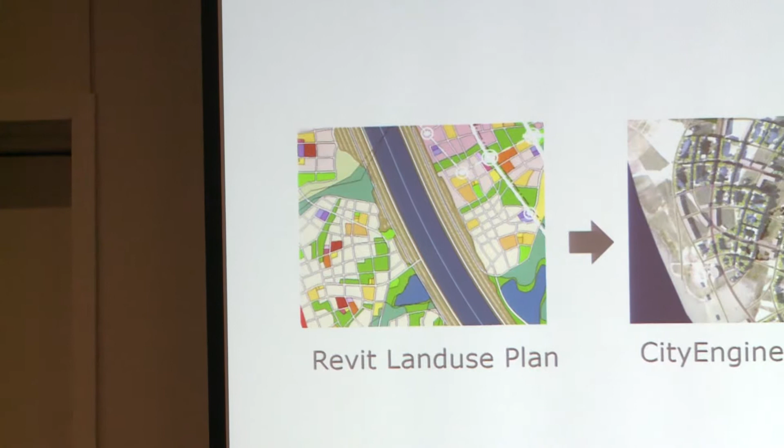So we actually have a sort of unique workflow, being that our urban planners work in an architecture firm. We use a lot of Revit. They use Revit like a hacked together GIS tool. So they do all their 2D land use planning in Revit as huge rooms, which is really odd, but nothing to do with GIS - it doesn't even know where it's on Earth. But at the end of the day, it looks like a themed map, and we can put them in books and stuff like that.

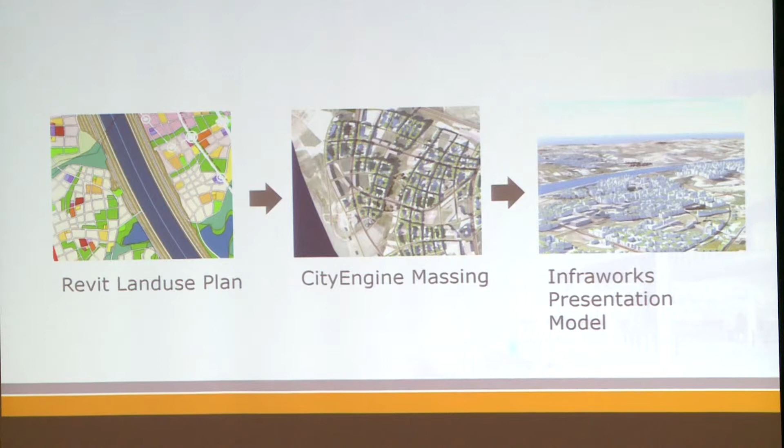So the workflow we actually worked through was Revit land use planning to City Engine massing, and all of that then got into InfraWorks, so it's like every product you could think of. We used this transect methodology that I mentioned.

Really, the workflow looked like this. So we would start in Revit, go into FME, go into City Engine for 2 pieces of data, both center lines and plots. And then also we would render out geotiffs from hatches and AutoCAD to make an image background to actually drive the land use planning. And then we'd use Civil 3D back into FME, and then also ultimately everything went back through FME into InfraWorks.

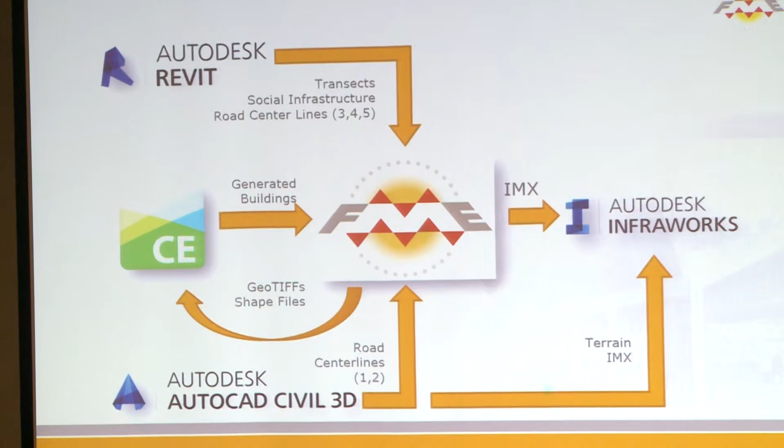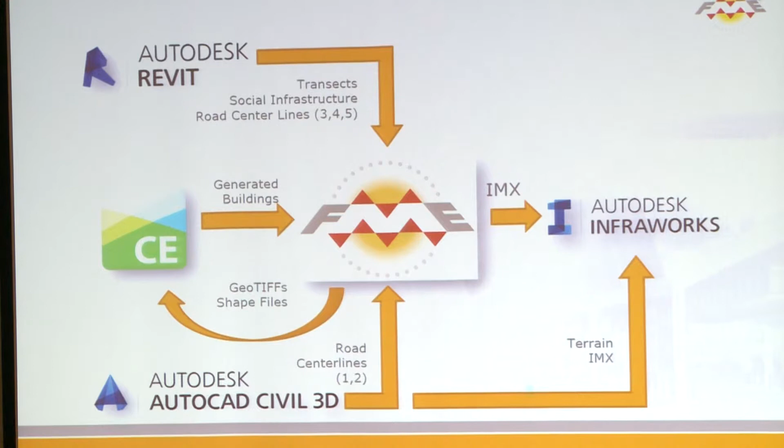So you ask why we did it that way. Well, InfraWorks is the only thing we could show someone a city this big. City Engine was the only place we could sort of programmatically develop all the buildings based on actual use, and Revit is where we actually did the planning. And then our engineers that were doing road center lines were working in Civil 3D and developing the topo surfaces.

This is a slightly modified version of the same thing that we're using on our next project, just more, slight variation on the inputs. I'm sure City Engine will come into play here, but now we're just saying we're going to go out to ArcGIS Online for publishing some data as well.

So this is the Revit workflow, and there are some animations here I always forget about. So Revit rooms become hatches, which go to AutoCAD, then into FME to develop the plots. You can see here we get an image-based background that comes out of that.

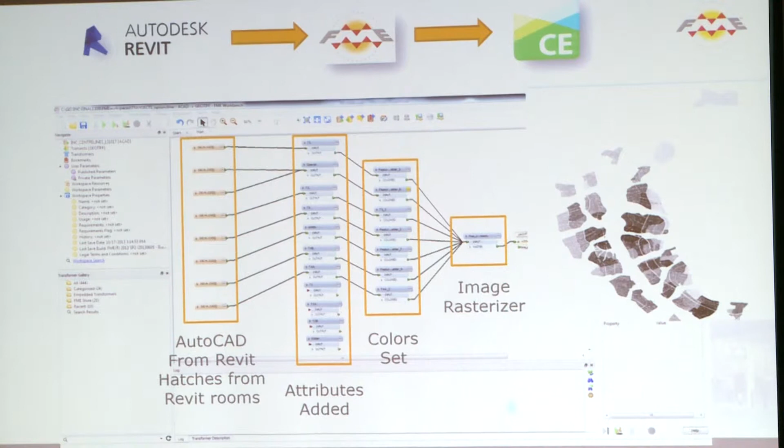That's actually the driver we use in City Engine. In AutoCAD, out of Revit, it was just hatches, so we gave them a tonal value from 0 to 1 in grayscale. That's how we mapped what in Revit was land use to how City Engine would manipulate the buildings and apply the appropriate City Engine rules on top of it.

Then we did the same thing for center lines. If you know Revit, these were room separation lines used as street center lines. A very odd workflow, but ultimately we were able to put it together.

The important thing to know is that really two people in this project worked outside of Revit. One person, Chris, built the City Engine workflow, learning City Engine at the same time as learning FME and putting the workflow together. Everybody else just worked in Revit, then did modifications to the rules to develop the content as it came out of City Engine.

Once we were in City Engine, we used 3DS. There were some limitations on coordinate system support in the version of City Engine we were using, so we couldn't go back through a file geodatabase directly into FME - we had to go out through a 3DS file. But all things being equal, we were able to do that.

With these land use plans we were developing - in Revit, once you have a room, you can essentially theme them in multiple views. So we developed a series of properties on those rooms, and those were dumped out as separate shape files for different land use types, or variations of shape files for different layer sets. We were merging and combining them.

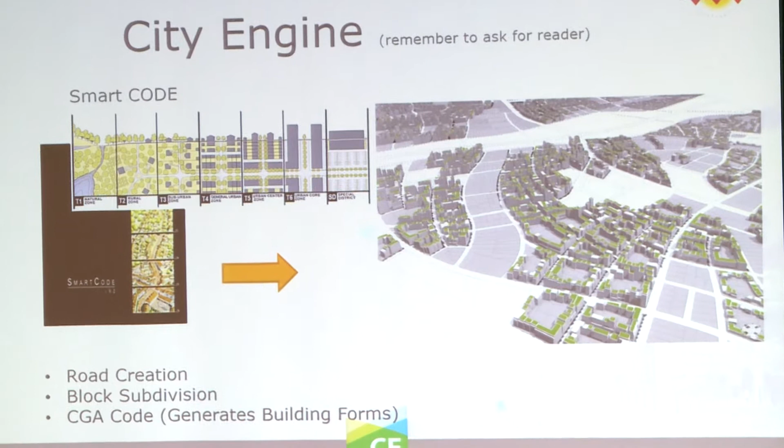I'll back up because there's a slide I missed - a sort of overview here. This is the view at City Engine. Unfortunately I can't tell you what the project is, so I don't have good overall data, but the actual site is about 100 kilometers long and various widths. So that's where we started.

As soon as we had FME in-house, we were confronted by the fact that our industry, AEC particularly, is not very automated at doing anything. So we started looking at all kinds of different workflows. We have a few database tools that we use connected to Revit.

There's a list here, but I'll go through them so we can get through it by the end of the session and hopefully get some questions in. So we use a Postgres database program management tool, basically for building programs - the space is this big.

We had a need for someone to walk a site, evaluate an existing facility, and get that information back to Revit. Pretty straightforward, but there aren't really custom tools built specifically for that - it's a very small niche. So we ended up hooking the dRofus database up to a Google spreadsheet. You walk the site, fill out the data in a Google spreadsheet, sync it back through FME Server to dRofus, and then dRofus syncs with Revit. That's the first extra workflow we did.

This one we're actually trying to work through right now: Revit and rooms in general on projects aren't network-based, but they represent a network.

So we're trying to figure out how to come up with an ability to do route analysis with FME on this sort of grid-based approach. We haven't spent much time on it. I'm sure someone could come up with something based on previous experience, but thus far this is one of the other things we're working on.

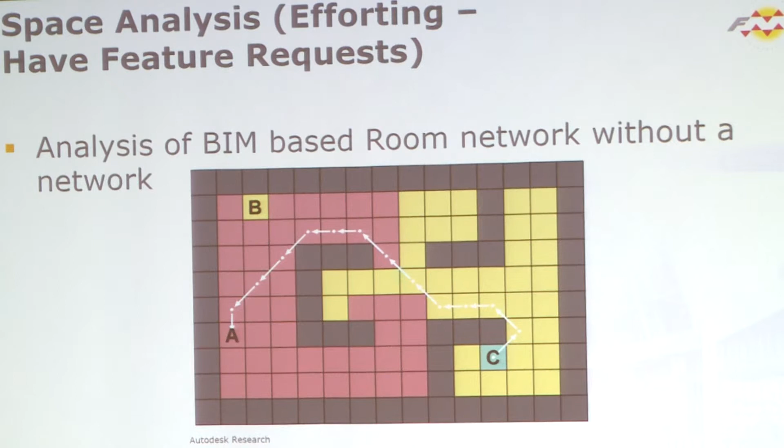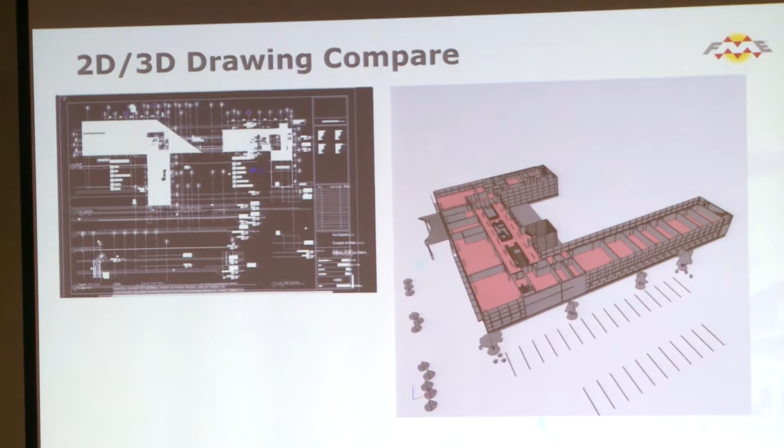We have set up 3D and 2D drawing and model compare workflows. This runs on the server. You submit a set of drawings in DWG or DXF, and we also have the same thing set up for model compare, basically two versions of IFC files or DWGs in some cases. The key thing here is we're finding a tool that does all kinds of things we can't automate at all, because Revit's sort of a brick when it comes to automation. These are the sort of things that fall out of that process.

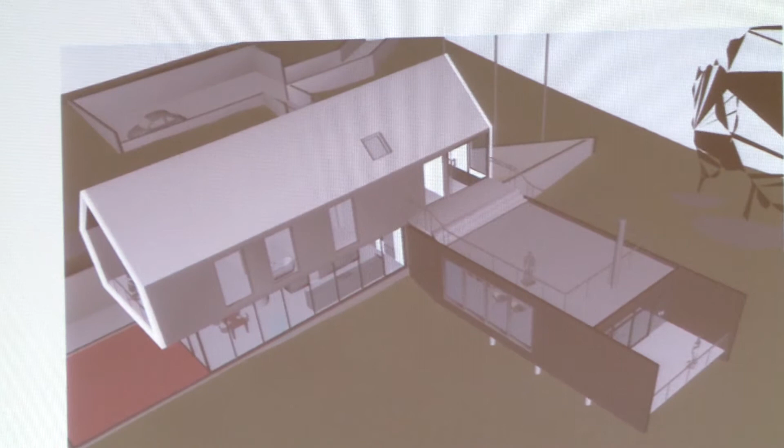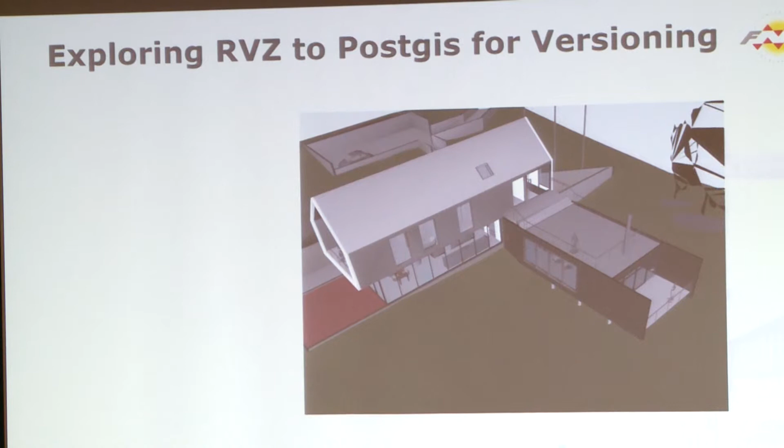We're exploring RVZ, the new file format that the guys at SAFE have developed through a Revit plugin that packages up an IFC and data, which you can then use directly in FME. We're looking at methodology to come up with some sort of versioning so we can compare across versions easier. There are a few tools, like an IFC server, we might look at for this too, but this is a 'hey, we can do it, we'll try it and figure out if it works' situation.

When we talk about the enterprise data management piece, all the things you saw there, every time we do them there's data in those models that, if we're going to process them, we want to extract. I'm working on a request right now where we have 1,000 financial projects, small projects, probably done in Revit, and we want to extract just how many offices were in them.

The one thing that's actually automated, which we built ourselves, is we capture every time someone syncs to Central in Revit. We built a tool that does this, and we started capturing - we know their office location, but we also start to capture the actual lat-long specified on the Revit file.

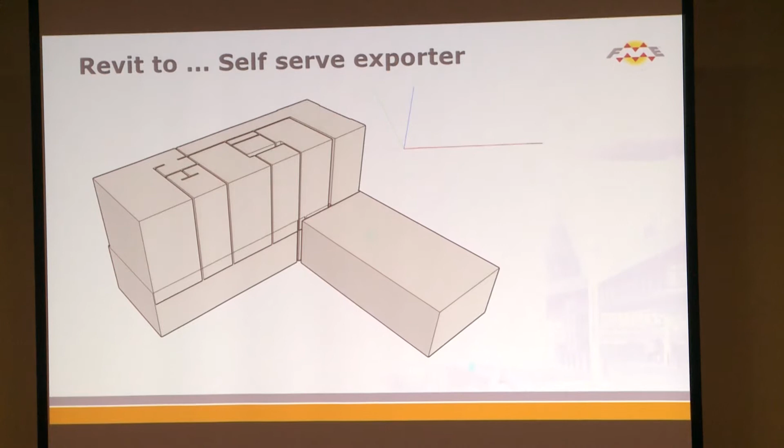When it comes to automation, we're definitely looking at RTV, and we're just starting to implement RTV Tools, a New Zealand company that Dale and others have started working with. What that really does is allow us to schedule a batching process. Not perfect - Revit doesn't make it easy to get past user warnings and stuff like that - but it's pretty close, for a large number of projects, to being able to do that. Then, like I said, we can create a pre-compiled data set to do these multi-project analyses as this happens.

So from a server standpoint, it's surprising that in the GIS and geospatial space, how much of this stuff has been taken care of so long ago that you can do things, not necessarily a batch way, but there's a way of compiling and bringing this data together.

There's definitely not in our main business. So we're really trying to start to introduce these things from various workflows. So there's tons of opportunities. I'm not shy of asking for things thus far, but it's pretty untapped when it comes to actually automating anything in this industry.

Apparently buildings are on Earth, which is a surprise to some people apparently. And there's a whole series of quality control, rule checking, you name it, scenarios where as soon as you have something you can read dynamically across multiple projects, you can start to build on top of.